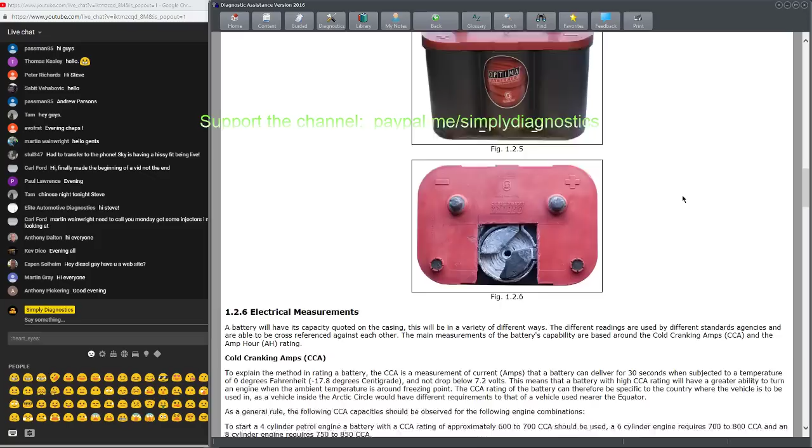Loads of information on batteries, construction of batteries, different types, identifiers, how they're made up, how the measurements are made. Literally that's just the first page. There's a night's read in there. There's an absolute night's read in there. It really is.

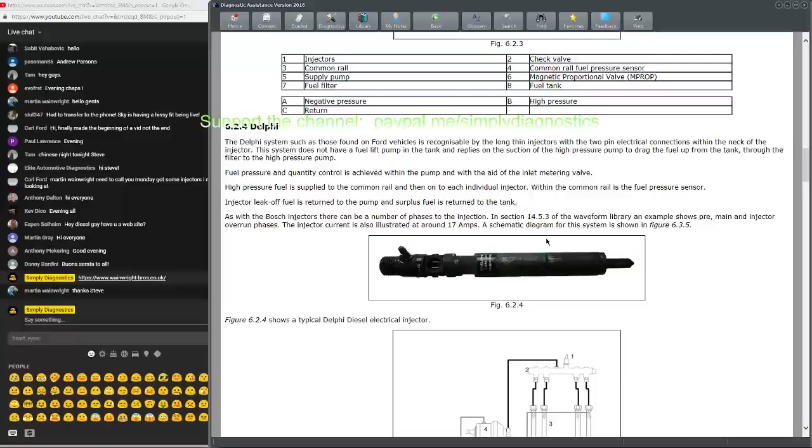So yeah, right, so that's page 1 of the fundamentals - types of fuel injection. So you've got enough theory there to poke a stick at, keep you busy for years and years and years.

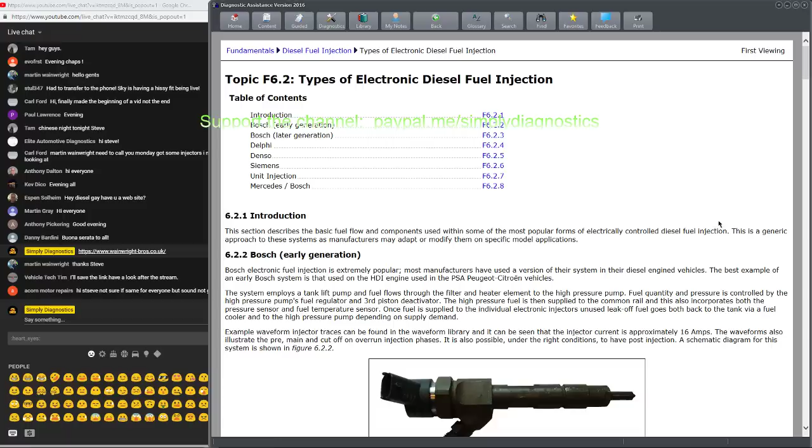The best thing about it is you don't have to turn any pages. You're welcome, Martin. Yeah, the link will be in the chat, so you'll be able to scroll through the chat afterwards. So I mean, as well as this diagnostic assistance stuff, it's tied in for Picoscope, but to be honest, as a standalone reference material, it's awesome.

Is there EV on here? Let's have a look. Content. Fundamentals. Hybrid vehicles - there you go. Types of hybrid. Yep, there's EV on here. Honda IMA. Toyota hybrid. It's literally - I mean, I've had this software now 3-4 months.

How's that, Mike? Is that better? Or do I need to drop it down even more? Drop it down a little bit more. What about that - is that even better? Awesome, okay yeah, I just had my mic gain turned up a little bit.

All Picoscopes - I don't know about that. I would imagine that most people will be using a Pico, will be using an automotive scope. I don't know, that's a question for James - will it work on all Picos or just the automotive ones? Like I say, this literally - it's a reference material on its own. This, never mind when we actually get to the diagnostic stuff.

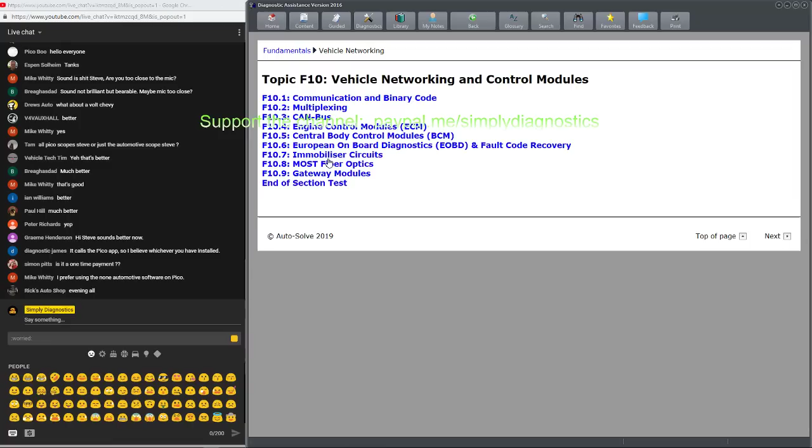Oh, Graeme, brilliant. Oh, there you go, so whichever's installed, that's good isn't it? So we've got everything at all - multiplexing, CAN bus, immobilizing, MOST, gateway modules. There you go, that's it. So basically this is the content button to find a topic, whatever you want to look at. Absolutely brilliant - a lifetime's work on the web. It's brilliant.

Then we get to guided functions. So I don't know, let's say we look - right, so let's search, let's search for something dead easy. Let's search for MAF. 30 pages - 30 pages, all tied in with the MAF, whatever we want.

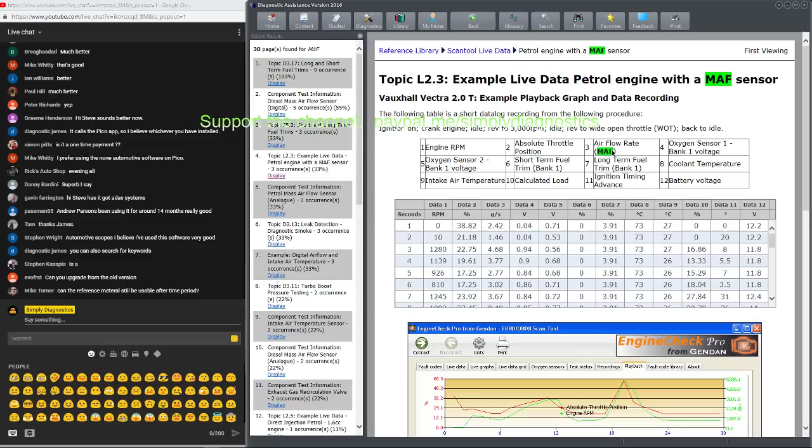So let's put example live data, petrol engine with a MAF sensor. So 2 litre Vectra, gives us example live data. Row 3 - see how it highlights us there so we know where to look. So row 3.

Yeah, it's just that you've got to have the dongle in, that's all. Pete, all the information's on the website, mate. Let me see, where is it now - right at the beginning of the chat.

So let's say, for example, now that's MAF references. Let's just say we've got another one - let's go for a DTC for it. So P0100. There you go - component test information, petrol mass airflow, digital petrol mass airflow, analog. Let's have a look at that - let's have a look at an analog MAF.

It's £202 including the VAT. So there's your DTC, there's your information, there's your DTC, your P0100.

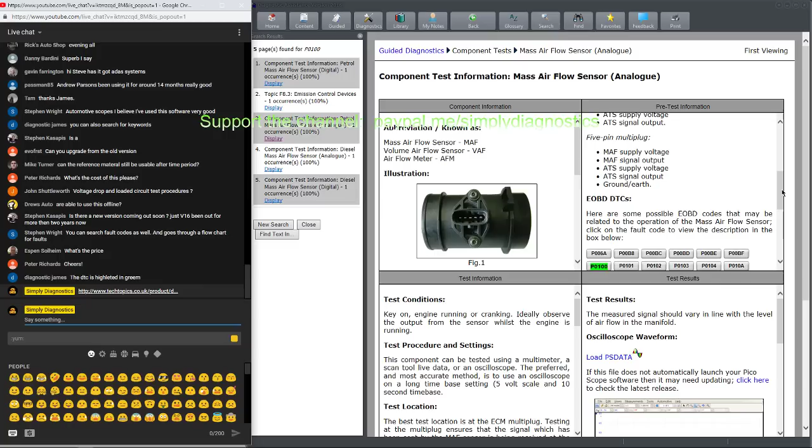Click on that - mass airflow, volume airflow, sensor A circuit malfunction. Gives you a little bit of background into the DTC, but then also over here it actually tells us about the MAF - what it's, see we've got MAF, volume airflow sensor, or AFM. So these are three acronyms that it's using.

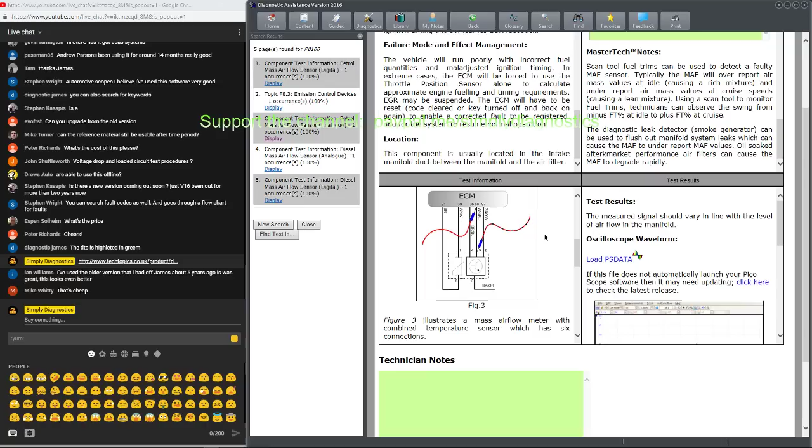Description and operation, failure mode, location, and what we can do then - scroll down, gives us testing conditions, how to test it, settings, best place to test it, how to connect it. So figure 3 is MAF with a temp sensor, 6 wire. Figure 4 is a MAF with temp sensor with only 5 wire.

Cheap, it's excellent value, and it doesn't time out. And then what we want to do, if we've got - so literally here we can read that information, we can find out how to test it, where to test it. If we want to, we can write in here our notes for our own personal learning. And even better, on this side...

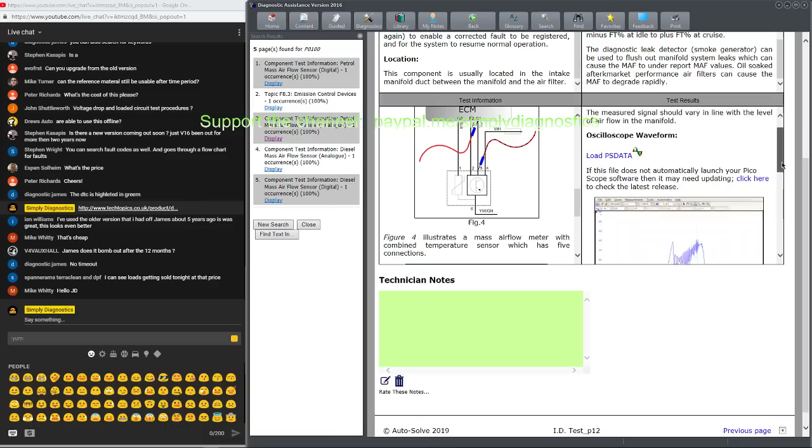Yeah, we can actually load the PS data. So if I click that button, and click that button there, what happens is that automatically fires up the Pico software. Seriously, it's not just the testing information - it really is a reference. So there's the Pico, it's actually loaded the Pico software, it's booted that up. Give us a reference waveform, set our scope up for us, and everything.

No, Drews, it's entirely generic, mate, it's not manufacturer specific. So a digital or an analog MAF in Britain is exactly the same as a digital or analog MAF in America. John, I'm running this on Windows, mate.

Yeah, it will, mate. I've got a Pico plugged in at the minute, but it actually loads up on the demo scope, so you don't need it. You don't actually physically need to have your Pico connected. This is a clean install now on my streaming PC for tonight, but I've actually got it installed on both my work PCs and every laptop I've got in the van as well.

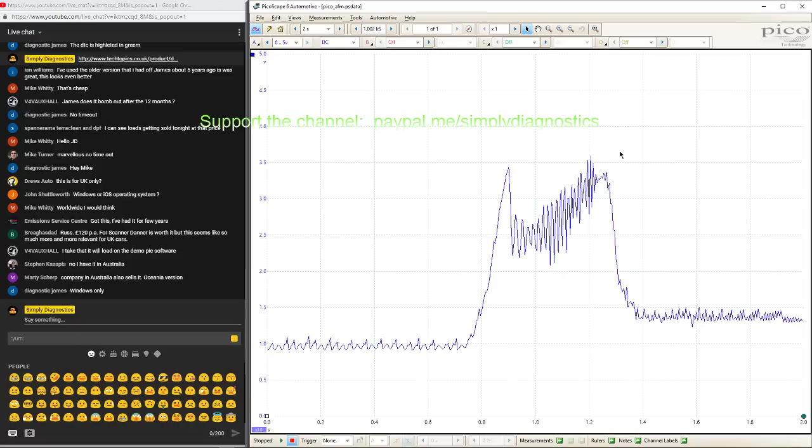All you have to do is make sure that you're carrying the dongle with you, and you put the dongle into whichever laptop you're using it on.

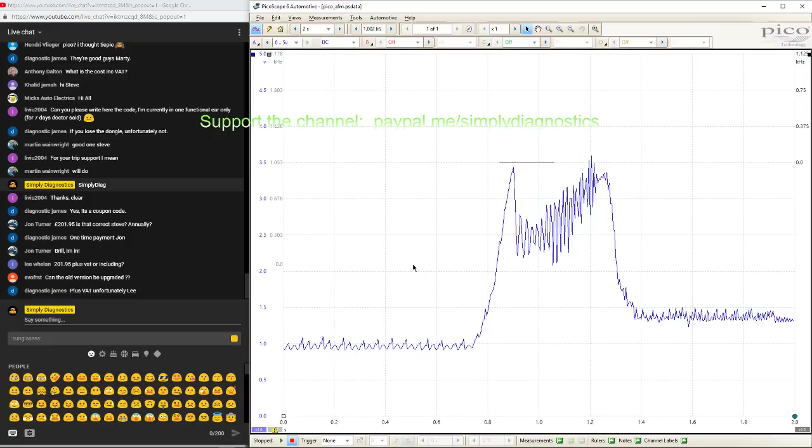So that's the MAF one. Let's search another code, or better still, let's go here. Let's go to home. Let's say we've got an ABS fault. Gives us all our learning topics, gives us testing, and then it gives us known goods and what we need to be looking at. So let's say we want to test an active ABS sensor, so we click on this here.

That takes us to the component testing information. Tells us what we need to know about it, basic info. Gives us the plug assignment, so supply and return, generic DTC.

So let's say a dead common code, C1139. We've clicked on that. C1139, wheel speed sensor, center tone ring, missing tooth fault. We've never seen that on a Renault or a BMW.

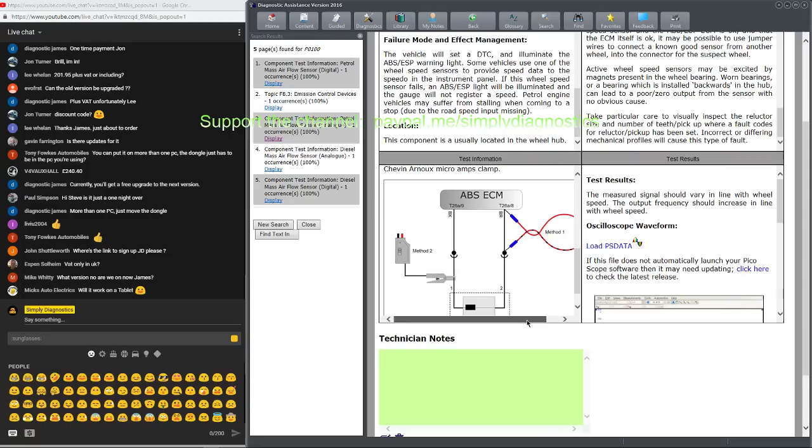So let's pick another one. C0037, left rear wheel speed sensor. It gives us some pre-testing information, what we need to be looking for and stuff like that. And again, test conditions, how to set your scope up, where best to test it, how to connect it. So we can either use a microamps clamp, or we can basically volt drop it across the wire.

And then here we go, example waveforms, information on what we should be seeing, expected test results. Let's load it. There we go, that's loaded that up for us already.

It just takes all the work out for all you guys that are a little bit scared of stepping down this path, or get a little bit worried, a little bit twitchy. It just takes all the work out. You can go from a fault code, a component name, or a component abbreviation.

Yeah, Great Big British Pounds, Mike.

So we can see here, we've got channel A and channel B, one connected normally and one connected differentially. It even sets the scope up for you.

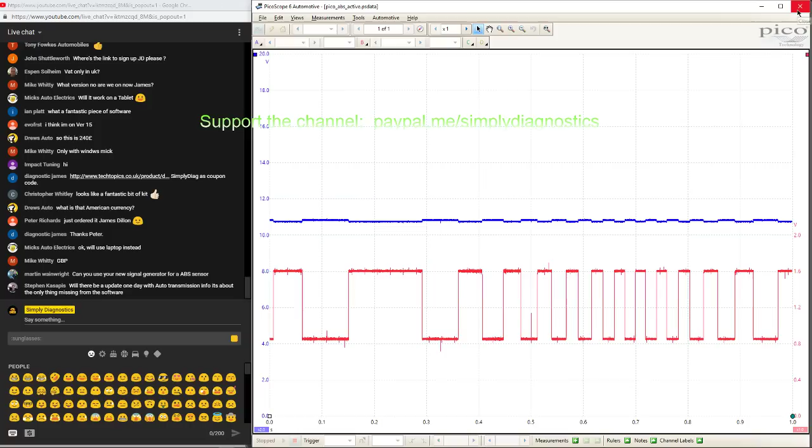Yes, I think I can, mate, Martin. I think I can, let's have a look. Is there anything about auto transmissions? We don't have a lot of automatics over here. Yeah, we don't have a lot of automatic transmissions over here.

So let's have a look at a charge. Let's get rid of that. Let's have a look at a charger. I just love browsing, mate, in no particular order.

So it gives us our learning topics here, the fundamentals of how charging systems work, Ohm's law, Watt's law, how relays work.

Let's say we want to test it. So there you go.

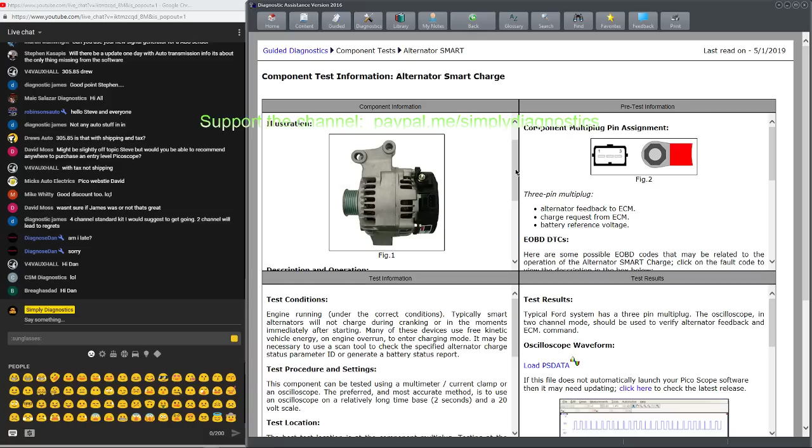So yeah, it's all the same sort of stuff, just absolutely solid gold information.

Like I say, it'll load the PS data, and then if we want to go into diagnostics, it gives us flowcharts and diagnostic procedures. So let's say we want to test, I don't know, something topical. There you go, CAN bus.

Yeah. Nice one, Lee, good lad. Thanks for the support.

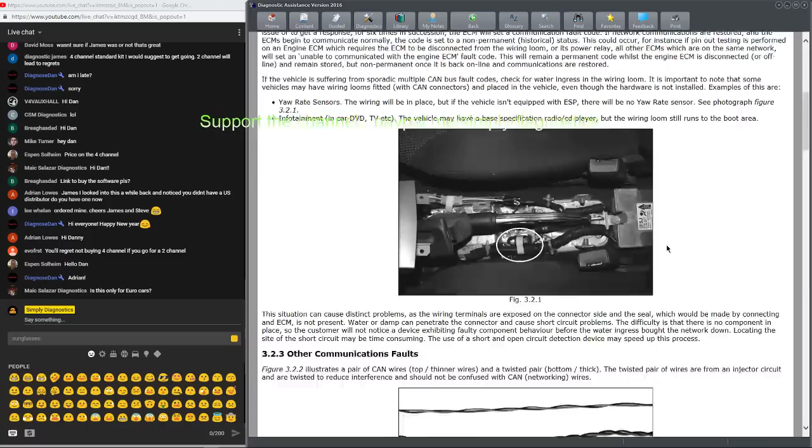Adrian's in it. Yeah, to be honest, 2-channel, if you really haven't got a pot to piss in, then 2-channel, because any scope's better than no scope. But you'd buy a 4-channel over 2.

Mike, no, it's not, mate. No, it's extremely generic. It's very generic, it's system based, not brand based or make based. It's absolutely fantastic, it is.

Steve is in here, there you go, he's just installed and reactivated his. Paul's in here. Yeah, it really is.

It's, well, I don't know, I mean, people might say I'm biased, but I tell you what, I wish I'd had this 10 years ago. I really do.

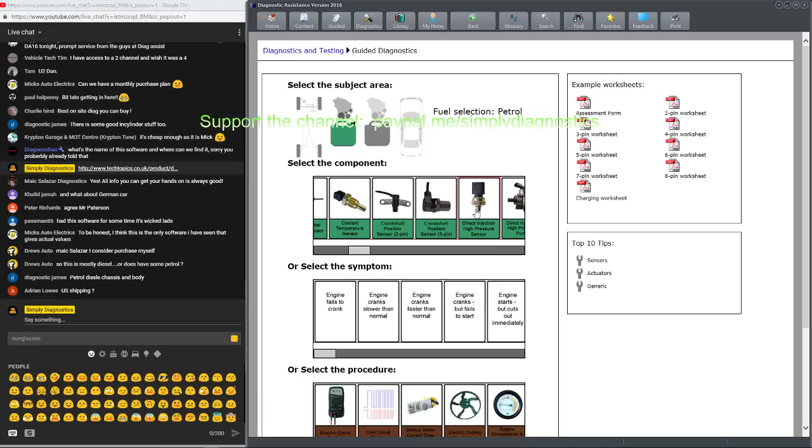Let's go back here. Let's say we want, well, let's go for the diagnostics, guided diagnostics, petrol. APP, smart charging, normal alternator, baro sensor, battery, brake pedal position, camshaft 2-pin, camshaft 3-pin, clutch, coolant temp, crankshaft 2-pin, crankshaft 3-pin, GDI fuel pressure sensor, GDI pump, GDI regulator, GDI injector, low pressure sensor, EGR, EGR vacuum, EGR recirc, normal injector, in-tank fuel pump, heated thermostat, coil with an amp in it, normal COP, multi-coil pack.

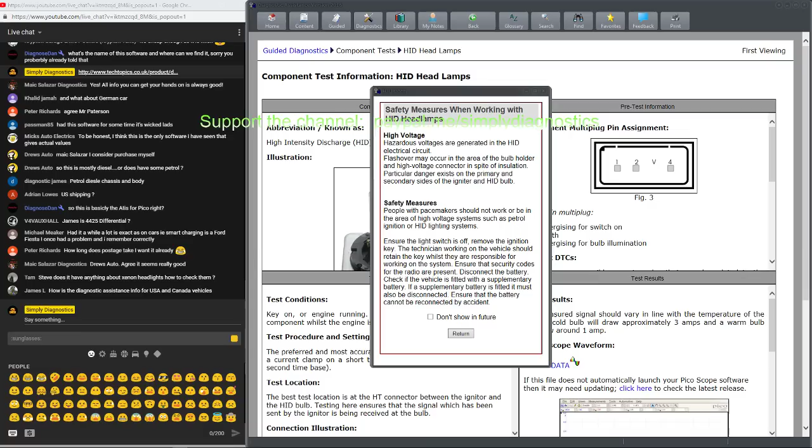It's absolutely xenon. Let's have a look, mate. Let's have a look. Guided - that will be body, I would have thought. Full failure warning, there you go. HID headlamps, you even got a safety warning. Let me put this over here. Yep, so you've got a safety warning there.

Test information, how to test, where to test. No cartridges in here. Yeah, well, there's not really a lot of shipping involved. Let me just fire this camera back on and I'll show you. Yeah, that's it, there's no - it's just a tiny little plastic box. It'll go in a normal jiffy bag. There's not really any shipping involved in that, I wouldn't have thought. It's tiny.

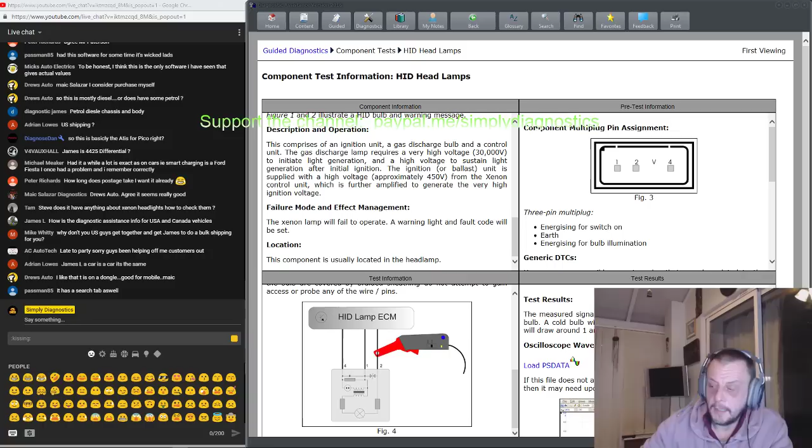Yeah, so again, like I say, it's got a very, very good search index as well. We can put anything we want in - let's put any code. C1135, is that even a code? Let's have a look - no. New search, let's try. Here we go, here's a good one - U1900. No search, no thing. Let's try U0100. No for that - they must be vehicle specific then, what I'm typing in. I'm just typing in codes.

So let's go for CAN. Oh, I'm looking on - oh, that's why. I'm looking there, let's go here. On the wrong page. Let's try network. There we go, CAN link - just not using the right ones. P1E00. P1E00, nope, nothing in there for that. Like I say, it's very, very generic, so if it's a manufacturer specific code, it's not going to be in here.

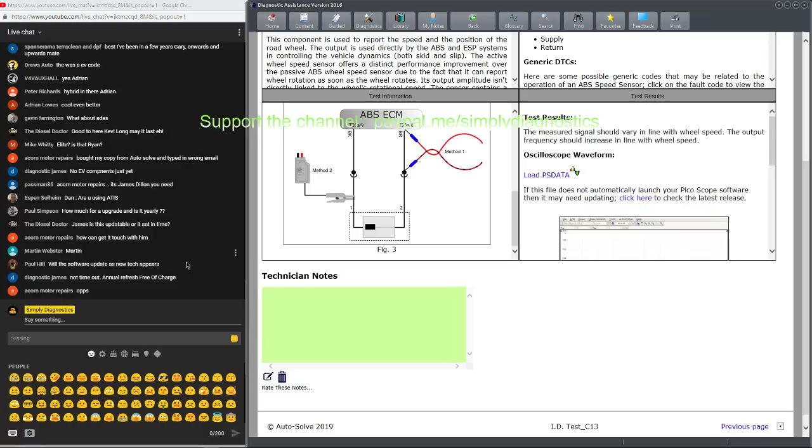Yeah, so it's pretty damned awesome. Find - there we go, there's another search. So let's look for EGR. What's it... I keep typing in stupid search phrases, don't I? Too generic.

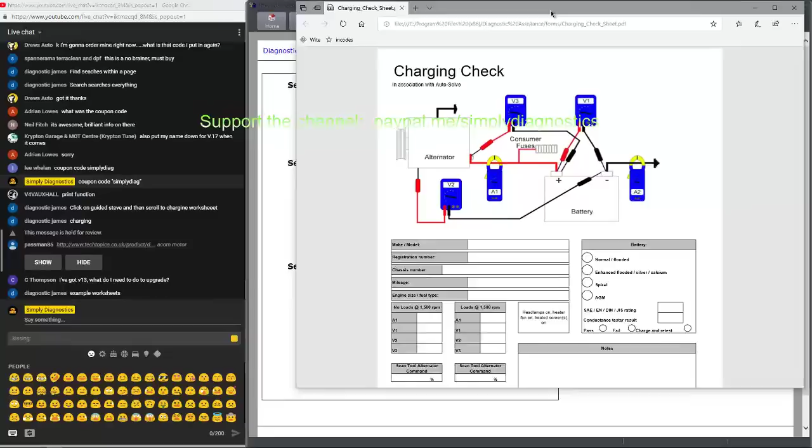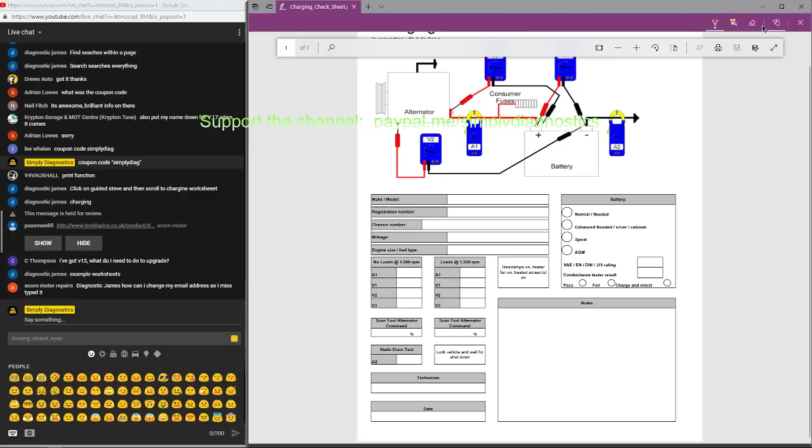Guided - let's have a look. Guided, scroll to the charging worksheet. Oh, I spotted this before. It's absolutely brilliant, look at this. Look at this - it even gives you a test plan, a test sheet. See if we can make... Look at that, so it tells you where to test. You're testing voltmeter there, voltmeter there, voltmeter there, ammeter there, ammeter there, make, model, registration number, what you get at each different test point. How awesome is that? That's brilliant, that is. That's absolutely brilliant.

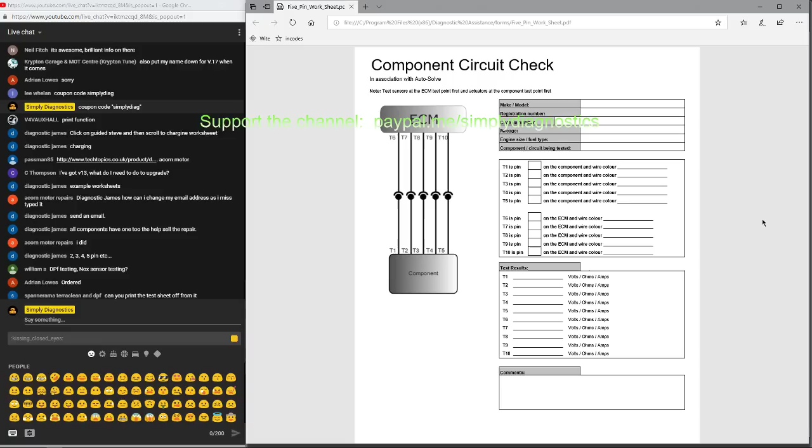We go, so let's have a look now. So if we go on to a component check, how awesome is that? Guided assessment form, 8-pin - look at that for an 8-pin. Yeah, no, you're right, we don't. Initial assessment form. So that's one for the front desk. Yeah, I would imagine so.

I can add notes on this, but it's a PDF. Yeah, so if you've got a program that you can write on a PDF, I would imagine so. Read aloud. What's that? Layout. Annotate it. So is that a highlighter?

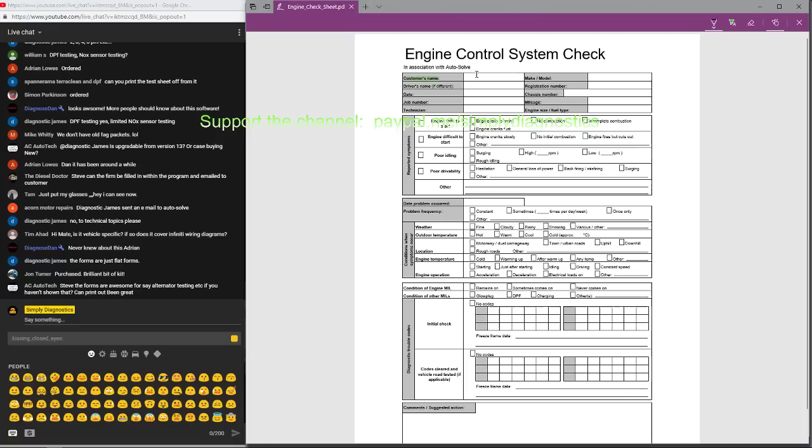There's a highlighter, I can annotate, I know I can write on it. I would imagine you just print these out though, to be honest. Unless it's a PDF, so if you've got Adobe, you'd be able to write on it. But that, for me, that's something you'd have on a clipboard in the car to save you going back to your wiring diagram. Like me, you'll see me in my videos quite often writing the pin numbers down, the wire colours, what the pin number on the component is, what the ECU pin is, and what the wire colour is. Well, that just takes all that work out of it.

It just seems really, really good. And then here we go, we've got top 10 tips for sensors.

Look at that, volt drop, volt drop, volt drop. Brilliant, not an ohms test in sight. Lee, catch you later, mate.

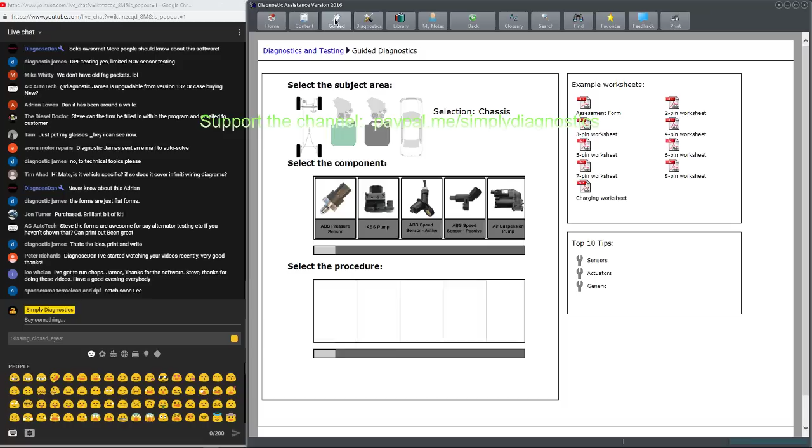Yeah, so petrol, there we go. So let's have a look at an APP. P0227 TP APP switch C, low input.

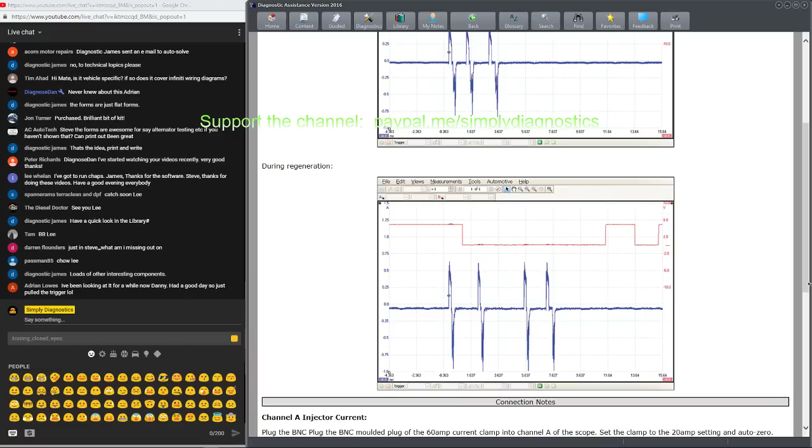Oh, look at that, injector, Denso injector. Oh yeah, injector during DPF regeneration. That's normal running, what you'd expect to see during normal running. Yeah, look at it, I take it that'll be the camshaft signal, will it? Yeah, that'll be the timing during normal running. And then look what's happening during regen, you've got pre and post injection. It's actually giving you background information on how everything's working.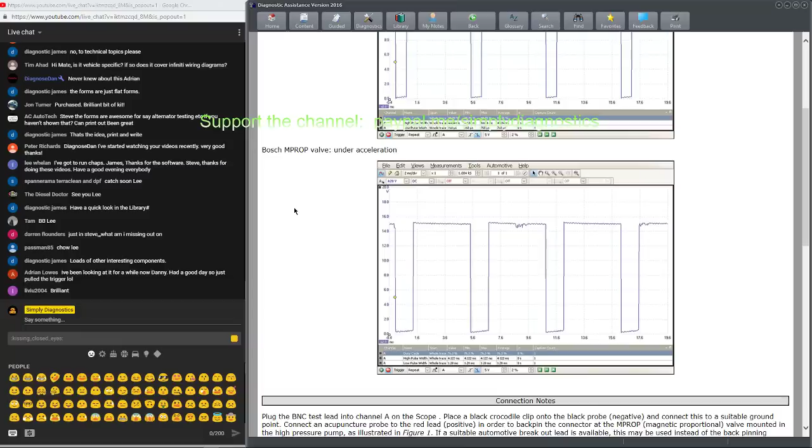Brilliant, oh what else is there? What else is there? There we go, MProp for the Bosch system, MProp at idle. Shows you how to connect it. Notes on the waveform, brilliant.

Absolutely fantastic, let's go back to the library. Waveforms, so let's see now. Where was I then? Scan tool live data, that's it. Look at that, you've got example live data for fuel pressure, map.

APP, got example live data and everything. Awesome. It's just there's more stuff here than you could read in a lifetime.

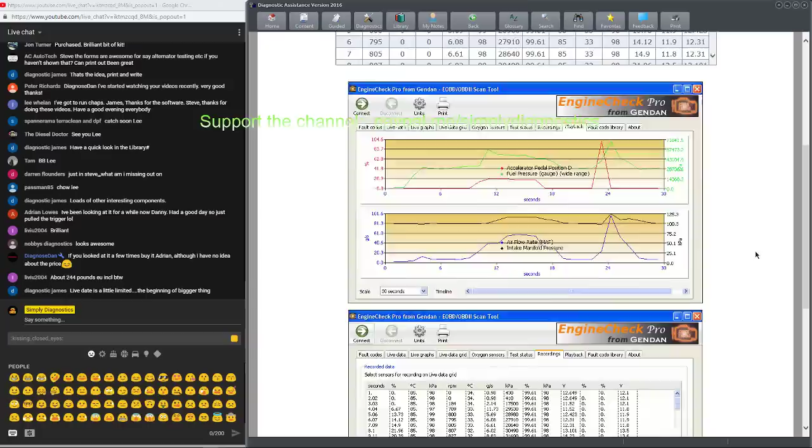Yeah, version 17 is going to be awesome. I can't wait, mate, I can't wait for the update. It's going to be absolutely brilliant. Pounds, mate, pounds, we're in Britain, Dan.

Look at this, engine fails to crank, we've even got a flow chart. We've even got a flow chart. There we go, there's a favourite, no comms with scan tool. Really awesome.

There we go, so a 2-wire crank sensor. Pre-test information, what we expect to see on the pins. Associated fault codes. Absolutely brilliant.

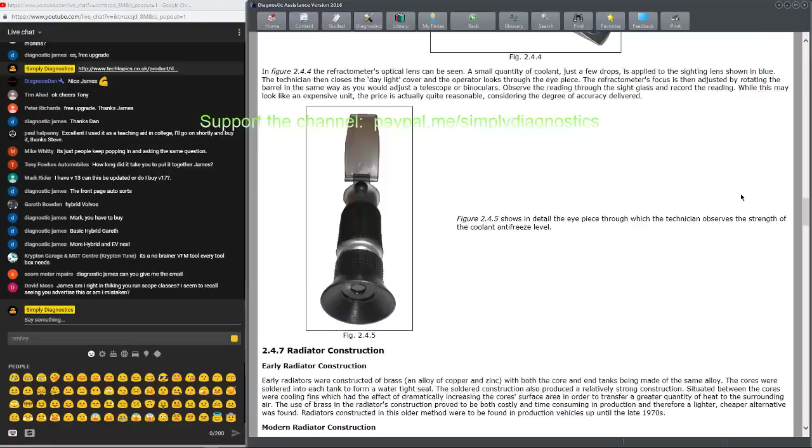Yeah, it's absolutely, I'm amazed at it, I really am. Let's just go for the very basic, a cooling system, how they work. If you give your year one, your level one apprentice access to this, how much valuable information is there that your normal apprentice is not going to have access to.

Oh David, you're correct, mate. Let's pull this over here and let's show you James's website. So we've got a training. So James's training, now currently the courses he offers.

EV Diag Bootcamp, Diagnostic Technician, Master Tech Program, EV Bootcamp, Manufacturer's Information. We've got e-learning as well, oscilloscopes, oscilloscope diagnostics, test scopes.

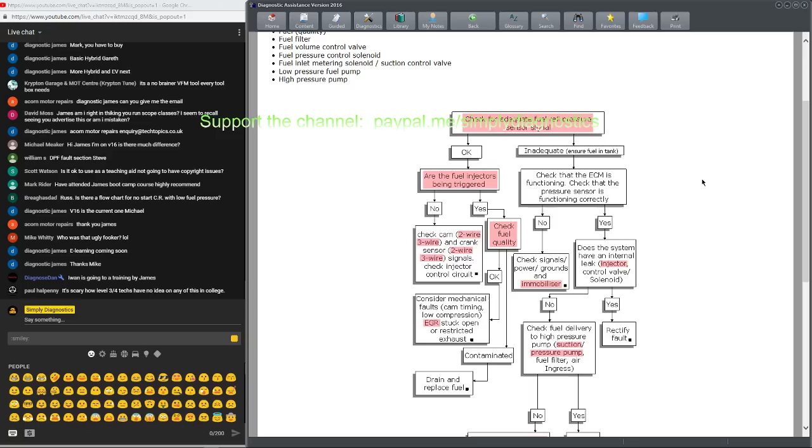Let's have a look, is there a flowchart for a no-start common rail with low fuel pressure? Let's have a look, mate. Let's have a look. Diesel, engine cranks but fails to start. Low pressure. It gives you test methods like to manually drive the pump, internal leaks, there's all sorts of stuff.

So what would be a low pressure code? Is that P0089 if I remember rightly? P0089. There you go, so how to test a reg.

We can even go better than that. Guided diesel diagnostics.

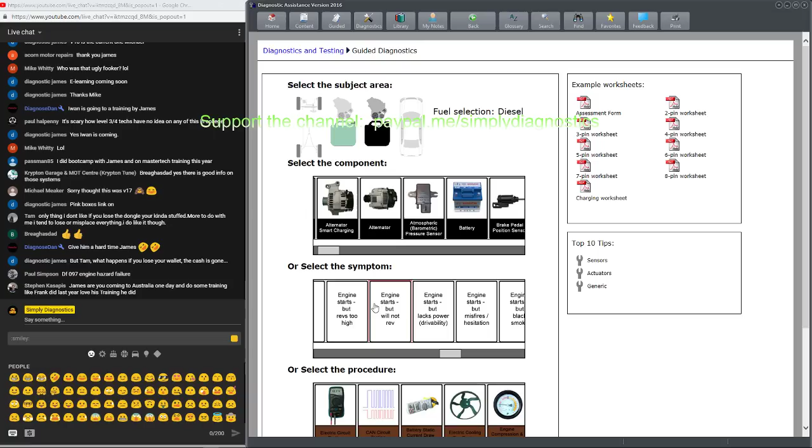Engine starts. Engine cranks but fails to start. Fuel system high rail, fuel system low rail, low pressure, pump inlet control. So let's say we wanted to test for low pressure delivery - test D8. There you go, it gives you a test.

Like James says there, the pink boxes link onto other stuff. It's just all tied in very, very nicely.

Richard, it doesn't matter that you're late, mate. I'll upload it when the stream's finished, yeah, okay.

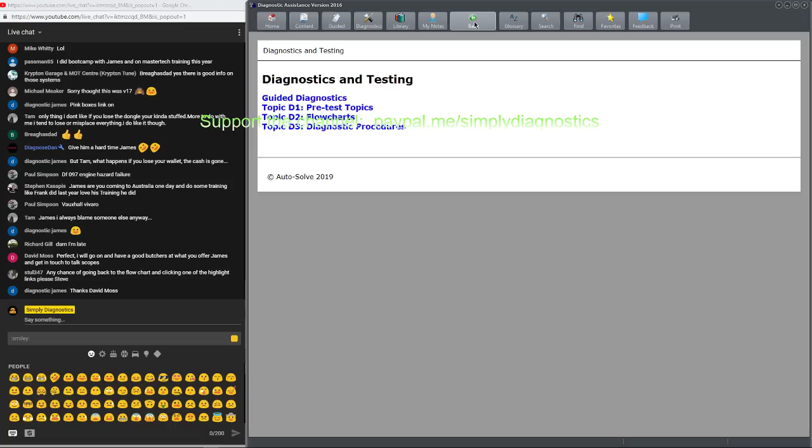So going back to the flowchart and clicking one of the highlighted links. Right, so let's say check for adequate fuel rail pressure, sensor signal. Are the injectors being triggered? Check fuel quality. So let's go for the fuel injector being triggered, yeah?

There you go. Where do we want to go from there? So if it's a Bosch injector, that's what we should be getting from our scope.

You notice there we've gone away from voltage when we're actually looking at it. We're looking at injector current. We're actually looking at the work that's been done.

Ryan's been on baby duties.

So let's go for crank sensor 2 wire. There we go, so that takes us back to the crank sensor stuff. Loads the PSDATA.

Let's look at an EGR.

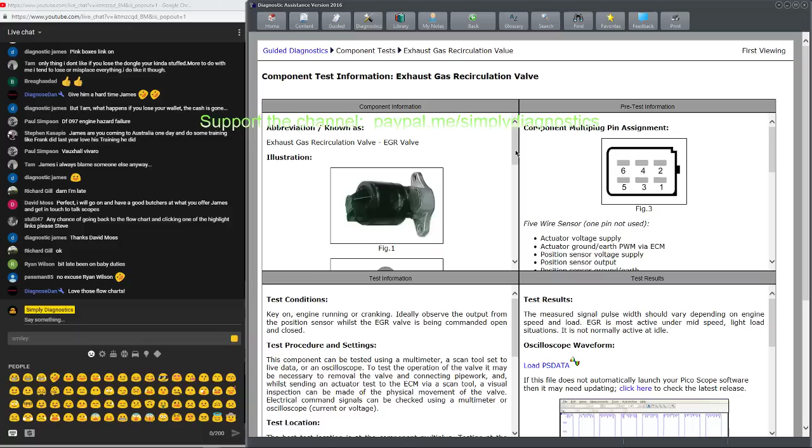It's just literally everything's so well connected, and you can go anywhere you want with it. Within the document it's so easy to navigate. I'm like, oh look at that, let's press that button, oh what does that do? And then so I'm looking at an EGR fault, and I press a button and I'm thinking, oh that's interesting, let's press another button.

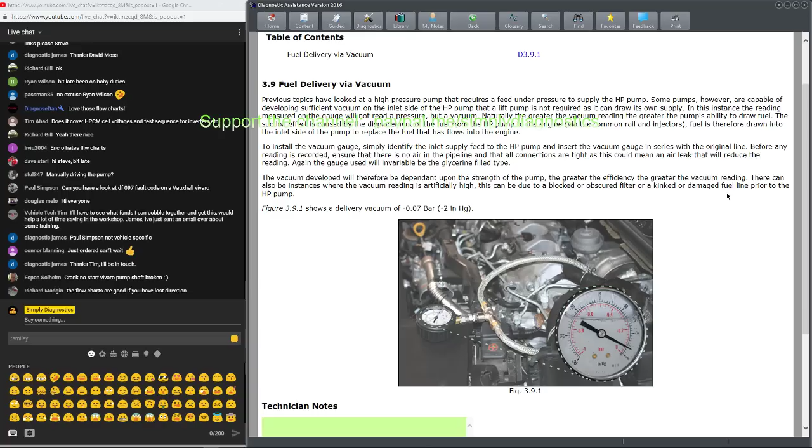It can just like, okay, well I've checked my fuel delivery now, that's okay, yeah that's fine. Is it a fault? Rectify the fault. If it's not, right, let's manually drive that pump to generate maximum. How do we do that? Let's click on that and it will tell us, tell us how to test it. And if we know how to test it, we know how to bypass it and do a bypass test.

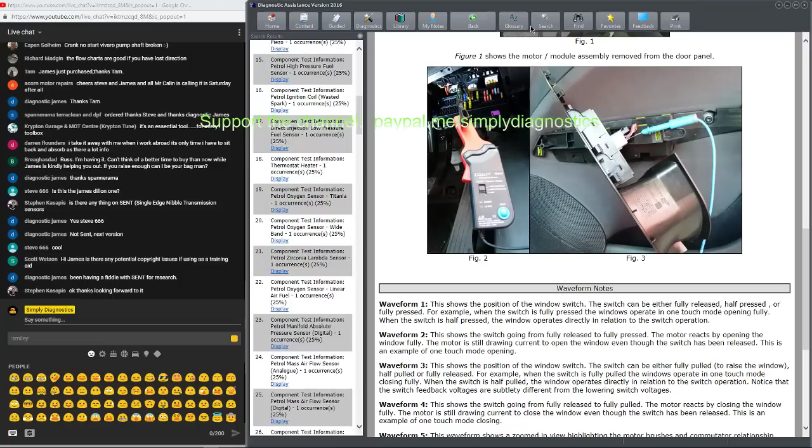I've not got my glasses on, so I can't actually read most of this text. Let's try nibble. It's a good job my auto complete isn't on. There we go - communication and binary code. Four bits are known as a nibble, and 8 bits or 2 nibbles is a byte. So it's not strictly SENT, but...

Pete, awesome mate, no worries. Thank you very much, catch you later.

SENT's still a bit mystical. To be honest, I think I've only seen one SENT sensor, or one sensor transmitting via SENT. I'm not sure if that wasn't a mass airflow meter. I'm like, oh what's this, I've not seen this before. It was on a new car that I was doing at Ford's of Winsford, and I just happened to probe a sensor. I'm like, oh, can't even remember what it is now.

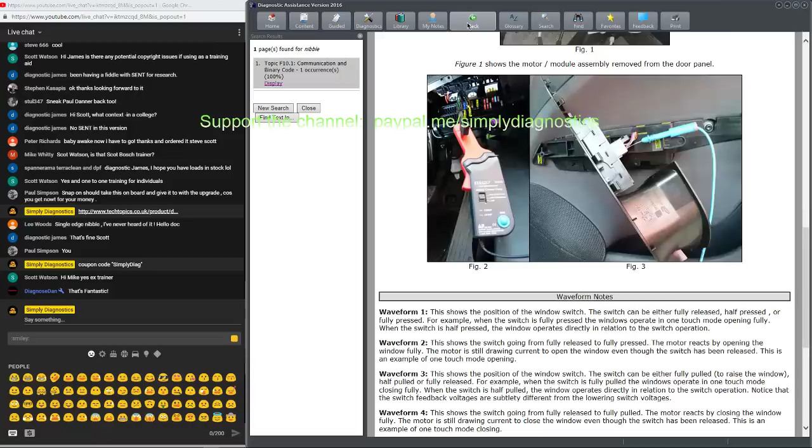It is fantastic, Dan, you're right there. Right, so has anybody got any more things that you wanna look at? We'll look at testing window switches, even something like that. Could be a really grey area, different waveforms there. Testing window switches and switch signals and stuff like that.

Oh yeah, next door neighbour's in hospital. He's got a bit of a kidney problem.

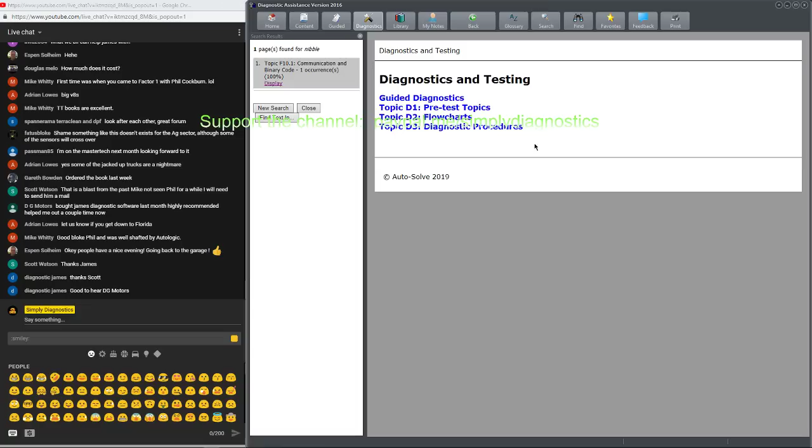Anything else? Anybody want to look at anything else? Have a look, pre-test topics, 6-step approach, absolutely gold. Absolute gold. Give this to your apprentice and then watch him grow.

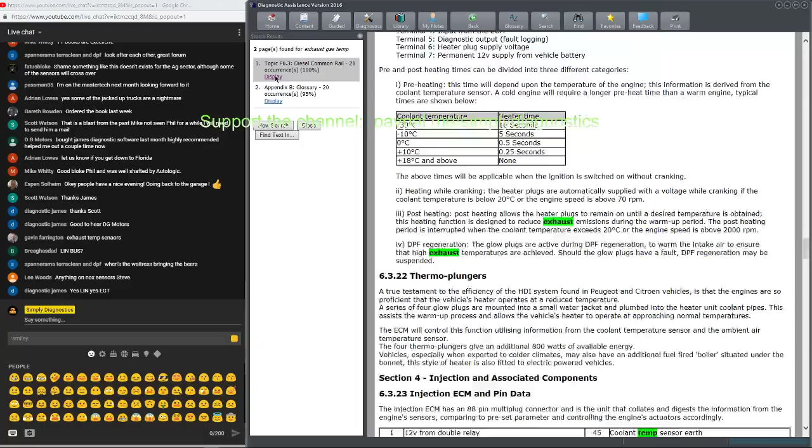Exhaust temp sensors, exhaust gas temp. Might not have been the best use of it. There we go, exhaust gas temperature sensor. There we go, look at that.

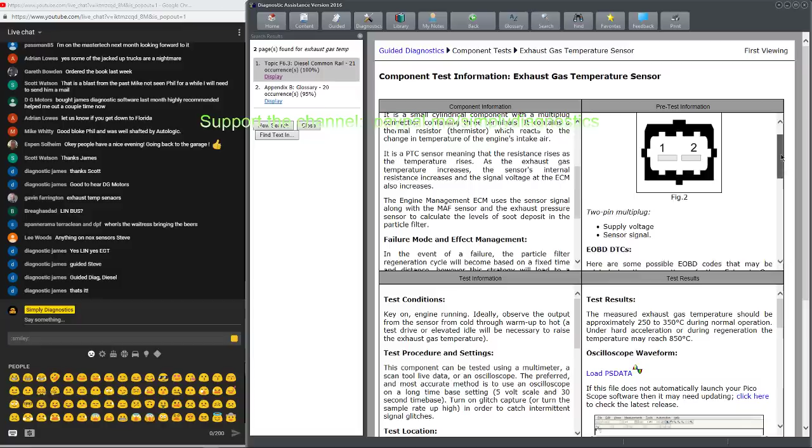Failure mode and effects, location, connection, what we need to be seeing, different DTCs. If you've got a generic code reader or an EOBD code reader and you want to know, there's no description.

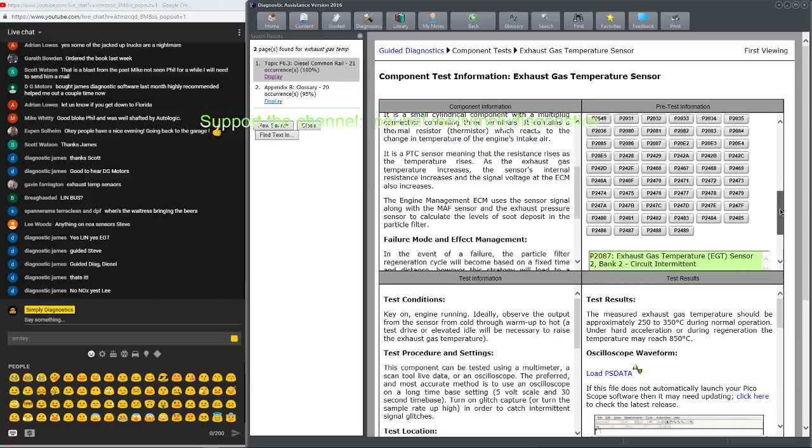Test conditions, testing connections, PSDATA, click on that, and it'll give us the...

Apprentice is only as good as the guy that's teaching him. It's your fault if you let him have his phone in the workshop, it's your fault.

So yeah, it's even set a way, even set a scope up for us. How awesome is that? Gives us a known good.

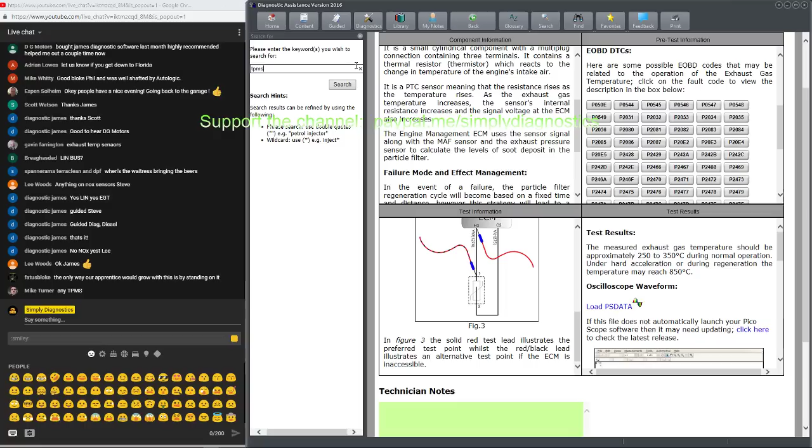TPMS, tire pressure monitoring, wireless device. It gives you a couple of codes there that you can look at.

How we can test it - it says basically using diagnostic equipment. No waveforms.

Night, mate. Night, mate. Yeah, that's it. Get it watched on the plane.

Awesome. We're going to move on to the ADS software now shortly, which is another unbelievable piece of reference software. It's an absolute no-brainer, even as generic information.

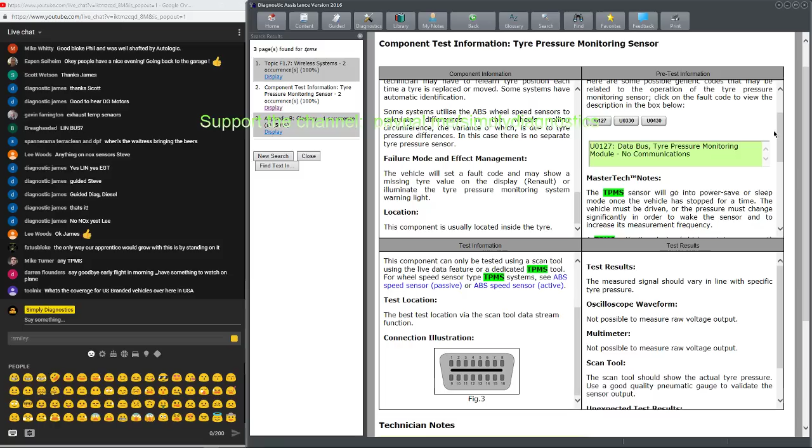So yeah, this Diagnostic Assistance version 2016 has coverage worldwide. There's absolutely no reason that anybody can't make use of this, whatever country you're in. Brilliant, absolutely brilliant.

Alright Ian, no worries mate, thanks for tuning in. Till next, you're on about the ADS stuff, we'll get onto that in a bit. COD 2, good lad - bet you got faster reflexes than me, Tam. Faster reflexes than me, mate.

Right, well, is there anything else anybody wants to see on this Diag Assistance?

Yeah, that's brilliant, that, William. Give James a call, mate - TTHQ a call, I'll sort it out for you. Safe journey, Darren.

Yeah, it does, you're right there - compression and timing. We've got everything: Atkinson, Otto, cam belts, and timing chains. So basic information there to give you a foundation.

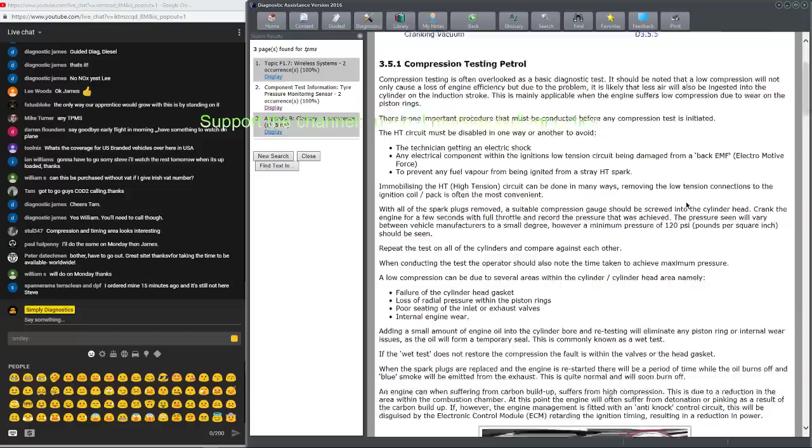Compression testing, relative compression testing using a vacuum gauge, manifold vacuum waveforms. So what you need to be looking for there - you've got good examples of manifold vacuum waveforms using a WPS.

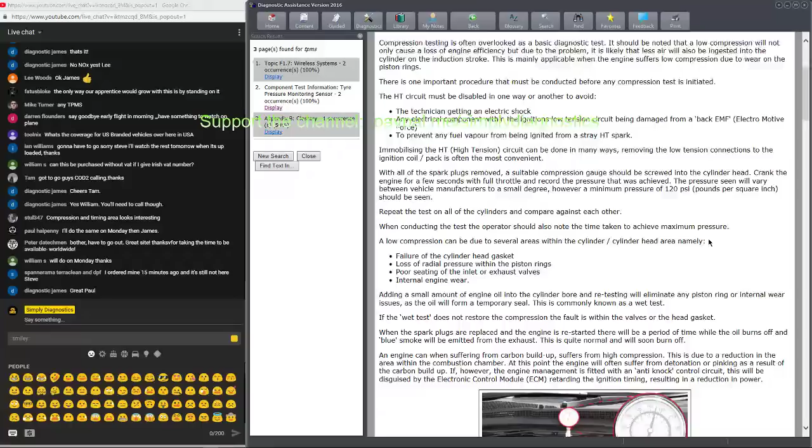In-cylinder compression - got through that there, didn't we? Cranking amps petrol, cranking amps diesel, manifold vacuum petrol.

Awesome, and then we go into the guided section - compression testing, in-cylinder compression testing, pressure transducer analysis, figures, reference material.

This is awesome, have you seen this? It tells you what each point is. I'm not going to press on every button, because then there'll be people just watching the video instead of buying the software.

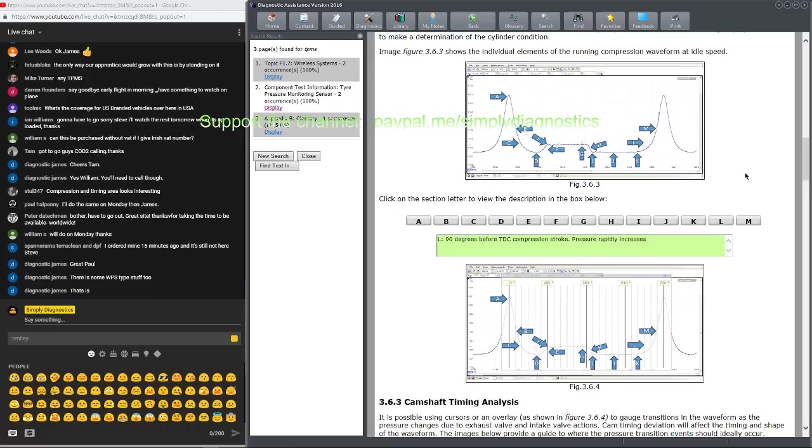It's absolutely brilliant. And then we go on to cam timing analysis. So again, it shows us literally where our crossover points are, what we need to be looking at. That's basically there - that's our cam timing correct. It's got the ramps crossing the threshold, the BDC threshold halfway up.

Advanced, retarded. Yeah, it is, it is.

There's information - seriously, I've been reading this for 3 months and I'm still seeing stuff. And I think, oh, look at that! I'll just have a read of that. It's absolutely fantastic.

Yeah, absolutely, it's solid gold stuff, this is. It's solid gold, and it even gives you general cam specs for an SI engine, for a spark engine. Durations.

Why would you not want to watch it? Why would you not want this? Running compression, which obviously is different than a cranking compression. Snap throttle.

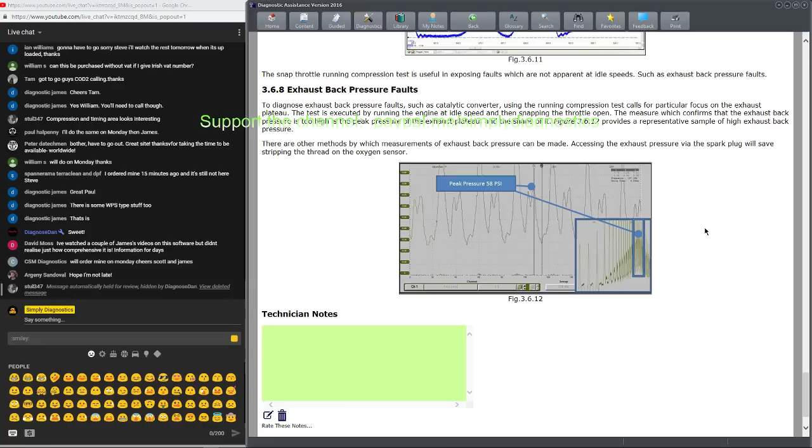Yeah, it's just SAF, it's brilliant, it really is. Yeah, good man, Stu.

Even this relay testing, I've read this now about 6 times. I test relays every day - good night Simon, thanks for tuning in, mate. I've done relay testing for years and years and years and years.

You look at this and you think, oh, why was this never - why didn't we have this when we were doing it? Like this information, when a diode's fitted, control coil is polarity sensitive. It tells you to have a look - if it's a diode, it's polarity, if it's a resistor on it.

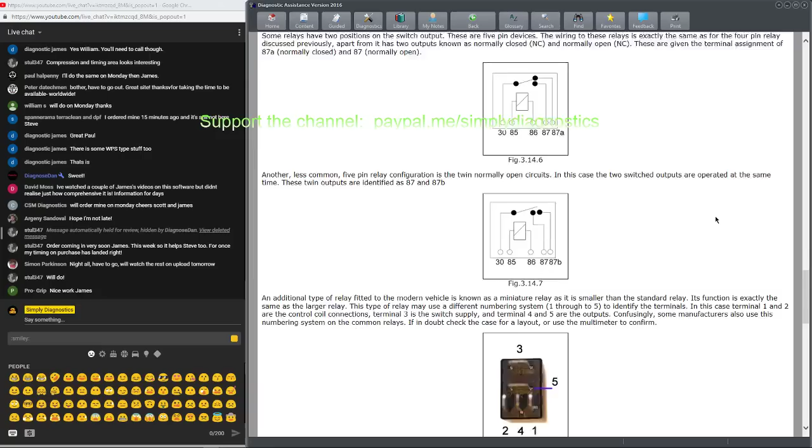It's absolutely awesome, it's solid gold, it is. They're relay testing - to read through that and to actually read it until you understand it. That's fundamental knowledge there that will stand you in good stead for the rest of your career.

So yeah, no worries mate. February might be a little bit too early, mate, because we're still on short days then, aren't we? We're still on short days there, and we're still on shitty weather.

Adrian, your wife probably hates you anyway, mate. Don't worry about it, mate. Just buy it - you're going to have to give her the house anyway, so it don't really matter, mate. Yeah.

Yeah, I do, I get lost, but I'm the same with this diagnostic assistance as I am with the ATIS. It's sad, really - this is pornography to me, it's brilliant. It's just fundamental knowledge here that'll last you for your entire career.

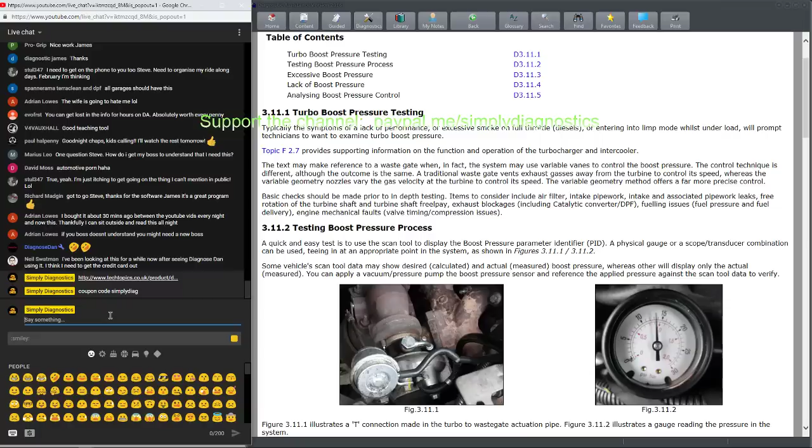So you've seen that, there's a couple of bits and pieces about this on the net, but nobody's ever really taken the time to explain just how absolutely awesome it is.

Look at it on fuel trims. Gives you tests for linear air fuel, titania, wideband zirconia, wideband O2 sensor. Gives you all the components of it, how it's made up, pin assignment, pin colours, fault codes, test conditions, connection, and it'll even load your Pico up for you.

It's just solid gold. I mean, we've been on this now an hour and a half, and I bet we've not even touched 10% of what's in there. We've not even touched 10%.

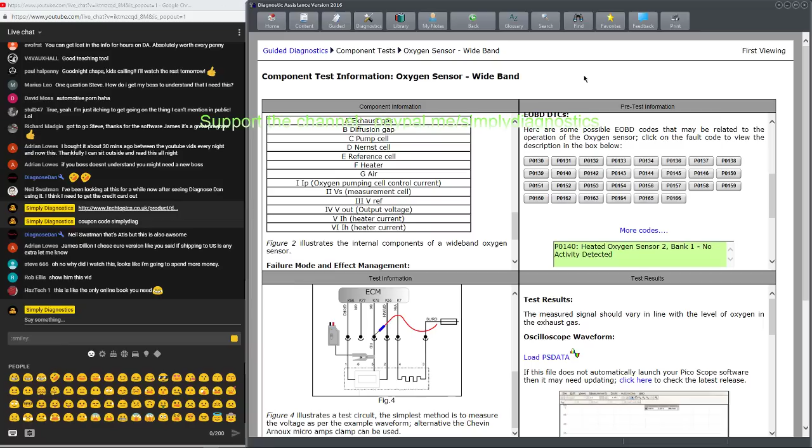Rob, that's a great idea, show him this video. Yeah, it's the ultimate reference material.

It really is. I've not made any notes here, but you can see I've got that on 3 computers. I can merge all my notes, so any notes that I make on any of the tests... I don't know, how do I enter notes in there? Do I double click on it or do I just write on it? There you go, so I can put my own notes in.

So for example, this is solid gold information. Must show boss man to get him to buy for me.

I can put a web link in. Awesome, so let's paste it. Let's see if we can do a Control V. There we go, look at that. Coupon code simplydiag. Many thanks.

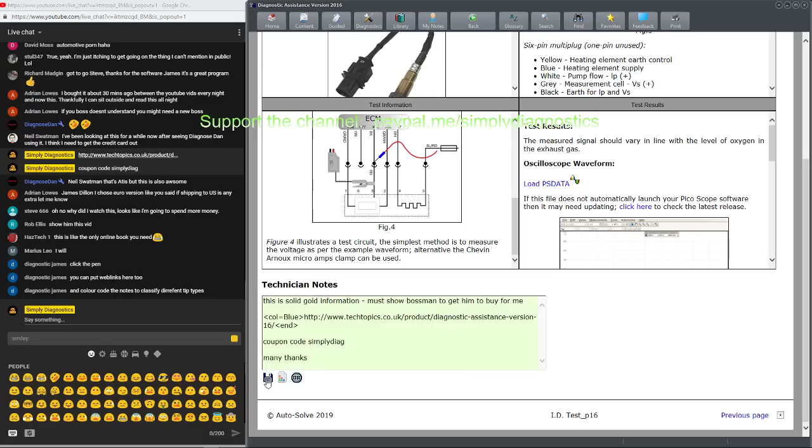We can colour code it, so let's have that as a blue one. Alright okay, so let's highlight that, blue one, there we go, so that's a hyperlink now. So now if I go and save that note, there we go, there's my hyperlink and everything.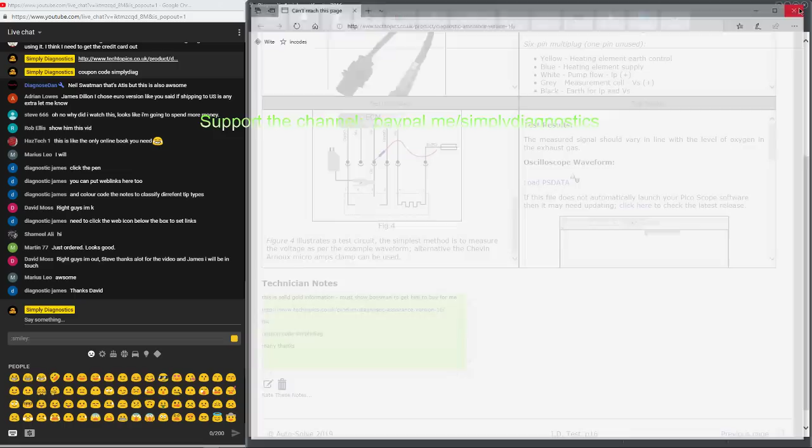I did it wrong, I did the HTTP twice didn't I? So let's edit that, let's delete all that. Paste that back in, let's put a web link in there. Control V, DA, OK, save. There we go, should work now. Look at that, there we go.

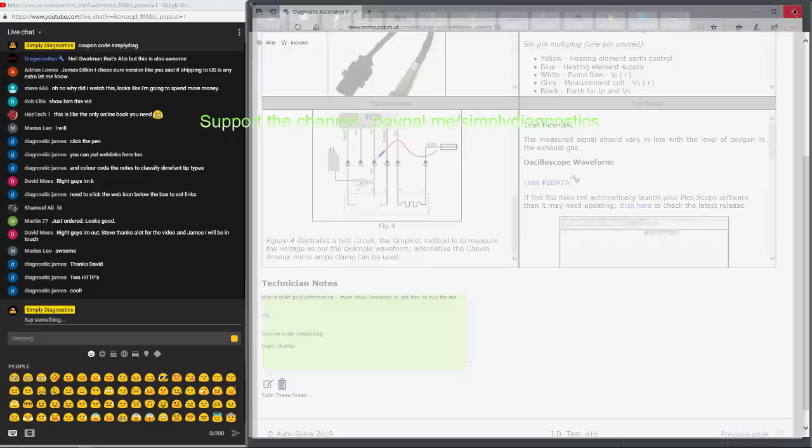So let's say, for example, I wanted to reference my video here. Let's just pause that. So let's say I wanted to do that, I'll copy that. So let's say now I wanted to put another link in there. Hit the web link, Control V, SD, OK, save. I found a video now that's referencing that. Click on that and it'll open my YouTube video to that there. That's probably the worst video I've ever done, that one. Don't watch that, it's diabolical.

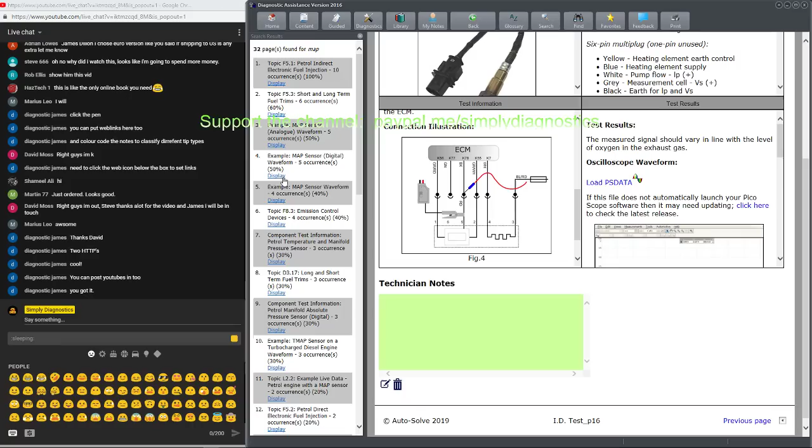So if I find a video, if I'm looking at a map sensor let's say. So map sensor, petrol indirect injection, map sensor, let's have a look at that. Where's that gone now, where did it go? That there, map sensor, example waveform, it'll show me that. And then what I want to do is type into my YouTube thing, Scanner Danner map sensor.

Copy. Double click on that, web link, paste, Control V, SD, map, okay, save. There you go, look at that now, I can open that up. I've got Scanner Danner's video on map sensor, how to? Oh well, that one's power steering, this is actually his pressure sensor playlist.

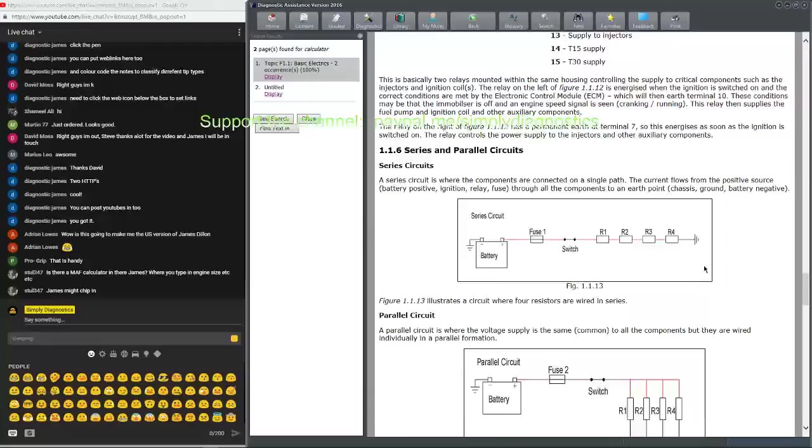MAF calculator, I think Tommy Forrest got a MAF calculator on his website. TFA Solutions. Oh, there you go, no MAF calc.

Yeah, I think he was out on the lash tonight, mate. He had an appointment. P0420 cat efficiency. Yeah, he's a good lad, Tommy. Very, very good supporter of our community. He's an awesome bloke. He really is, he's an awesome bloke.

Right, well, I'll tell you what, we've been going now, what, an hour and 40 minutes. I'm getting tired.

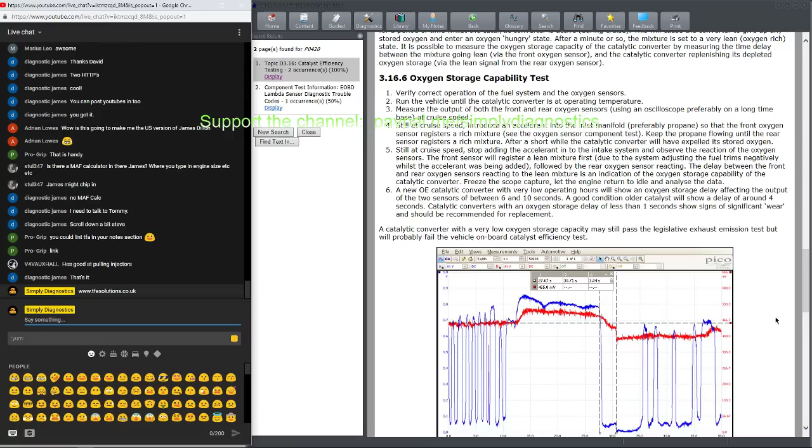There's absolutely everything here, like aftermarket cats, cat poisoning. See this here, this is the gold bit here. Oxygen storage capability test, right. This is the nuts and bolts of the test. What we're doing, why we're doing it, the information behind the test. It tells you why you're doing it and what you're expecting to see. You know what you're actually looking at. What information you're trying to harvest from the wiggly lines on the screen. It's just brilliant, it really is.

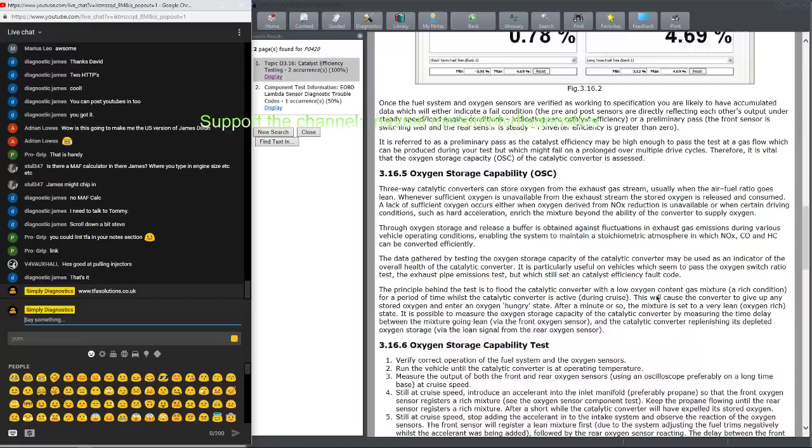Like this here, the vehicle is presented with a P0420 or 430 efficiency code. Vital that the system's checked and vehicle running is performed prior to condemning the cat. A leaking manifold gasket can give you a P0420 or something like that. If you actually take the time to read the information that's on there and read it until you understand it, it's absolutely... well, I don't know how else to say it. And there's tests somewhere I've not done.

Where are the end of module tests, James? There's end of module tests, isn't there, that you can actually have a look at to test your knowledge. Later, Paul. Cheers, mate. Drive safely, pal, enjoy your evening.

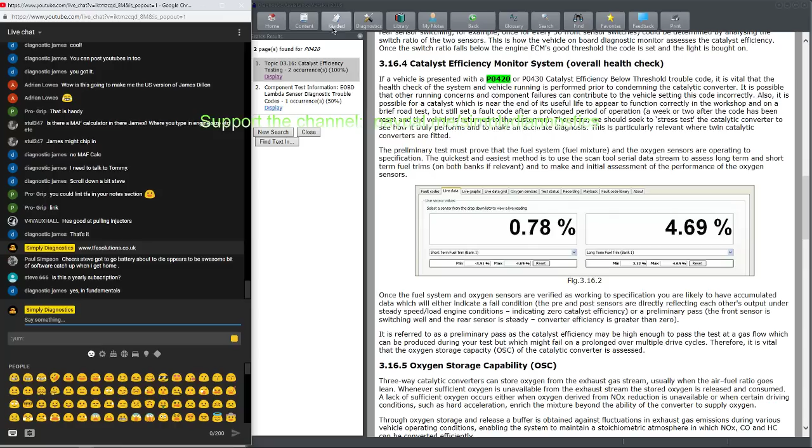Fundamentals. Contents, fundamentals, there we go. Right, so there we go. So let's say we want to look at emissions and emission control devices. Right, there we go. So it actually gives you tests, you can test your knowledge. And if you don't get it right, go back and read the section again until you do get them all right. And then you're not just learning to pass the test, you're actually understanding the information.